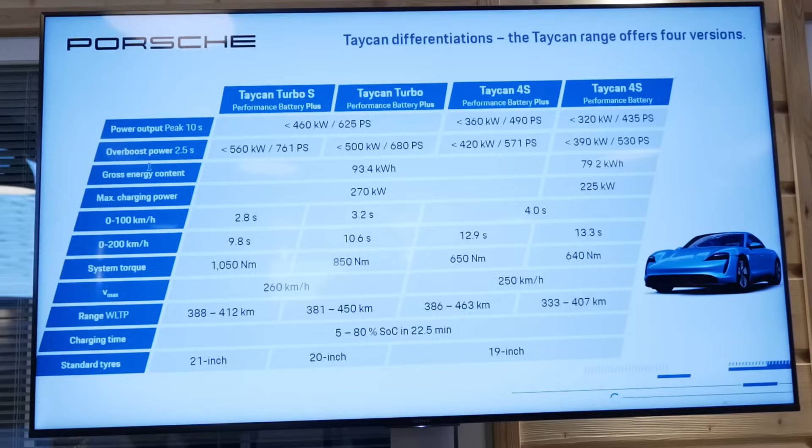All of the vehicles we can see here, all four Taycan derivatives, are four-wheel drive vehicles. They all share, for example, the same two-speed transmission in the back. They share the same dimensions, they share the same trunk space, and try to modularize the powertrain concept.

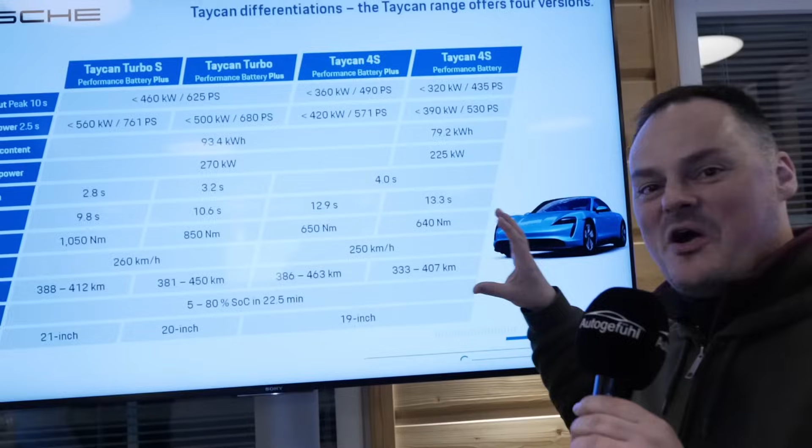Now, obviously, there's a huge amount of technical data for us to wrap our heads around. If I take off my electric car hat and just look at this standardly as a car, we can make some adjustments in terms of how we're looking at the data to make it easy to relate to.

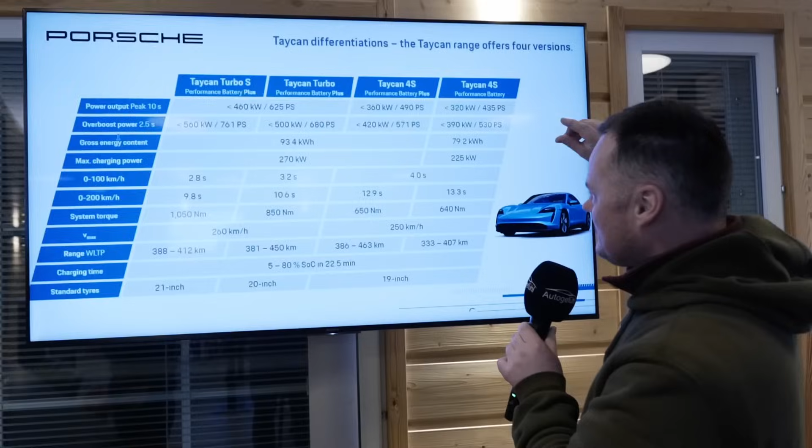So when we're talking about the difference between the 3 different available cars and then the 2 different battery levels, what does that mean in terms of range and in terms of power that is available to us?

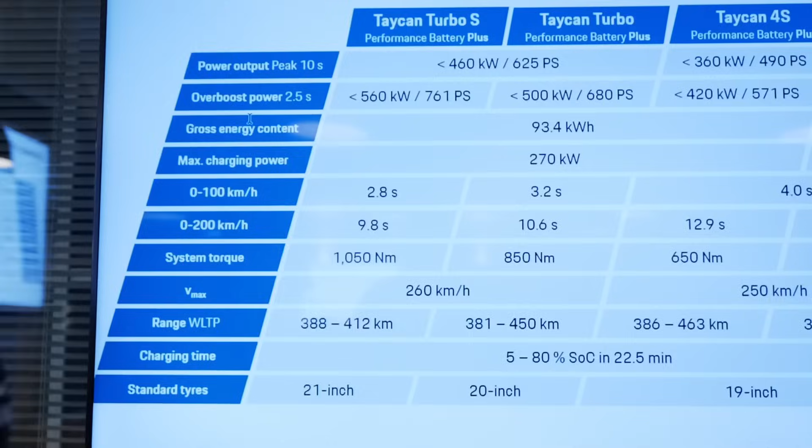Well, I'd actually like to start one step before that. We're positioning the Taycan derivatives via their performance figures. What do I mean by this? If you look at this line, the 0 to 100 figure, they're pretty neatly staggered from 2.8 seconds over 3.2 seconds for the turbo, and now the Taycan 4S with 4.0 seconds.

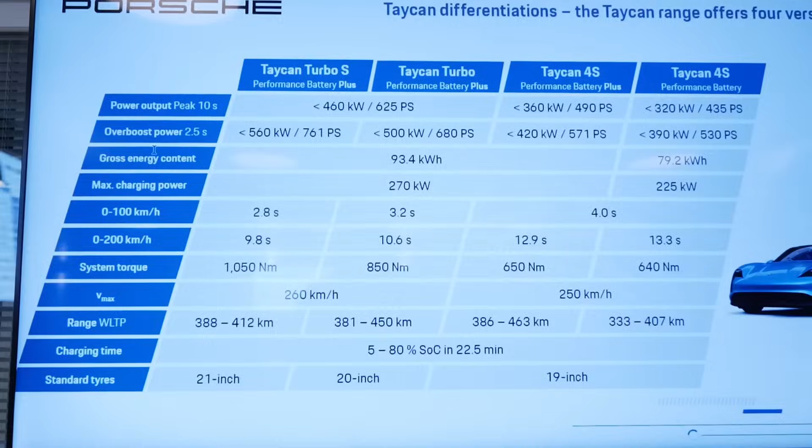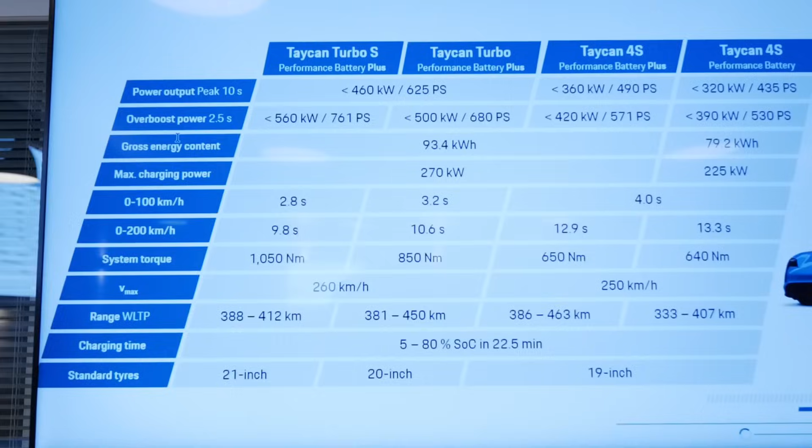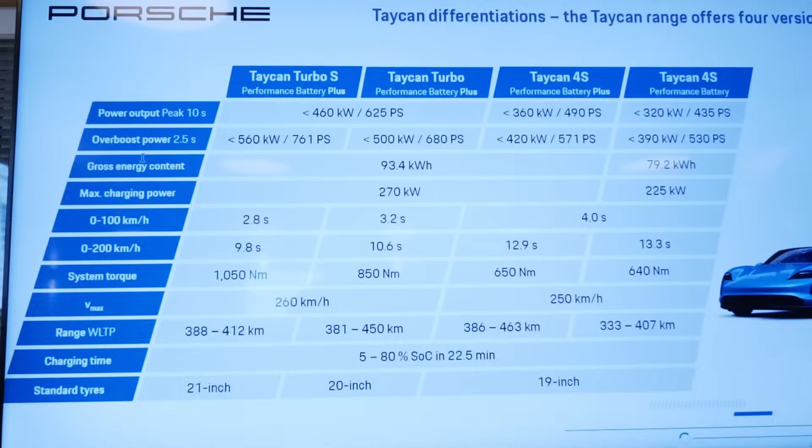What then in turn happens is you need to adjust the power and torque output you need in order to achieve these performance figures. And that's basically what happened. We have incredible overboost power of the Taycan Turbo S, up to 560 kilowatts, then down to 500 kilowatts for the turbo. And now the new 4S has 420 for the bigger battery and 390 kilowatts for the smaller battery.

So this is one of the first things that I'm a little bit challenged by. Here we have a 4-second time for the 4S with the standard and with the performance battery. Now, the performance battery, that's going to weigh more. So how are you keeping exactly the same performance time for that with more weight on board?

Well, that actually was kind of the key challenge, if I can put it this way. As I said, we want to position the cars over the performance figures, the 0 to 100 figures in the market, and that what needs to happen with the roughly 80 kilos less in the smaller battery, we need to reduce the torque level and we need to reduce the power output in order to achieve the 4 seconds.

Basically, both derivatives are, as I said, 4-wheel drive. Nevertheless, they are differentiated roughly by 40 kilowatts in the performance output.

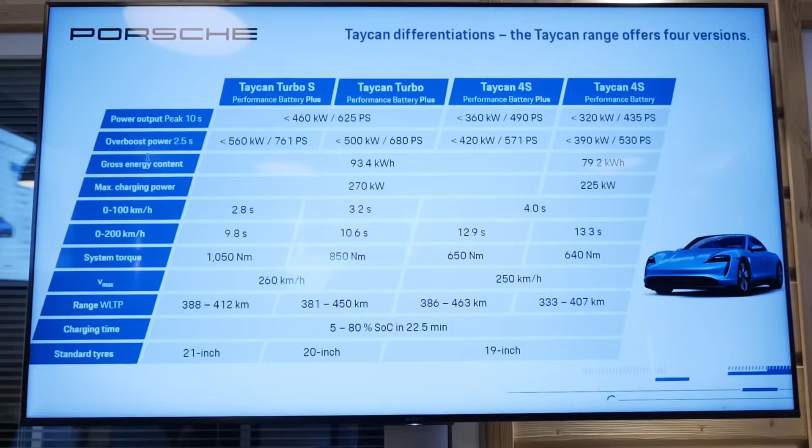So between the Taycan and the Panamera, say, do you have any idea from lighter to heavier what the difference is in weight? Well, yeah, we do have 2,295 kilos, and down on the right side, the range is 2,140 kilos. So there again, that helps us to have a pretty good understanding of what the difference is in terms of, really, I guess, my expression would be technical achievement, because if you consider how the car handles versus how you expect the car to handle with that kind of weight on board, it really is significant.

Now, if by the wizardry of technology we could ask for the next slide, look at this. Autogefühl magic, I say that, but actually it's the guys from Porsche really helping us out. So look at that. Now, I'm going to be completely honest here, this comes to the next thing that I'm not entirely clear on.

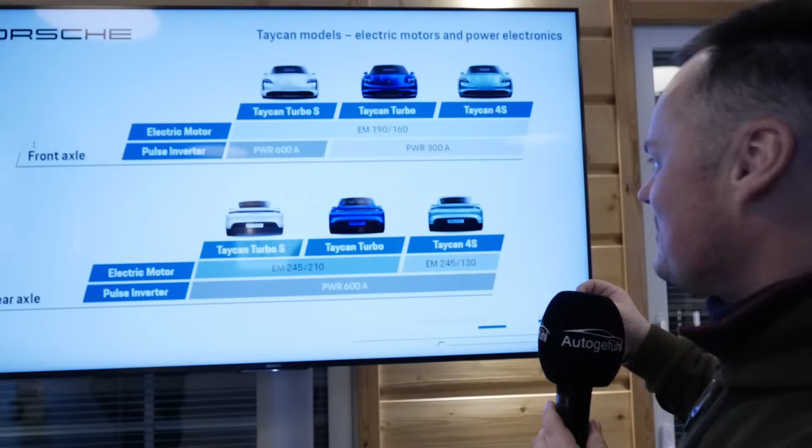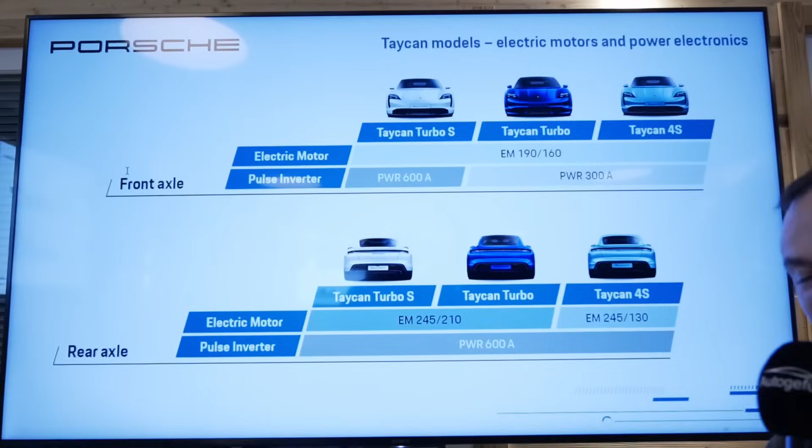This is a really important feature. This is clearly how the car is being powered. Electric motor in the front, electric motor in the back, but they are not standard throughout the whole lineup. There are differences. Fortunately, Bernd is going to be very helpful in explaining to us exactly what those differences are. Well, at least I'm going to try, I think.

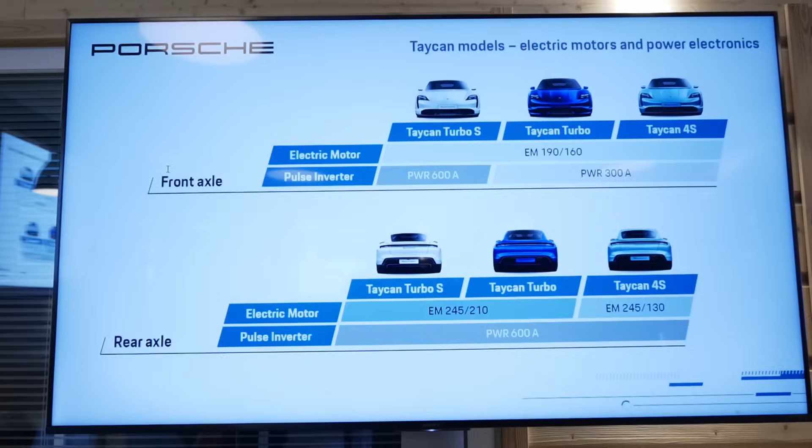Let's start at the front axle. Basically, what we did, we tried to take a modular approach, so we tried to minimize complexity in the car, and that also holds true for the electric motors and power inverters. So what happens on the front axle is all 3 cars share the same electric motor. The numbers stand for diameter, so it's a 190 millimeter diameter of the electric motor, and the length is 160 millimeters. What then happens, we differentiate the cars in terms of their pulse inverters, the power electronics.

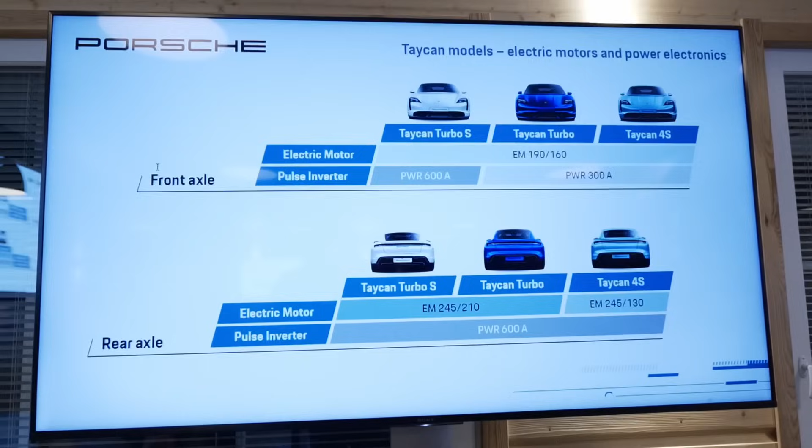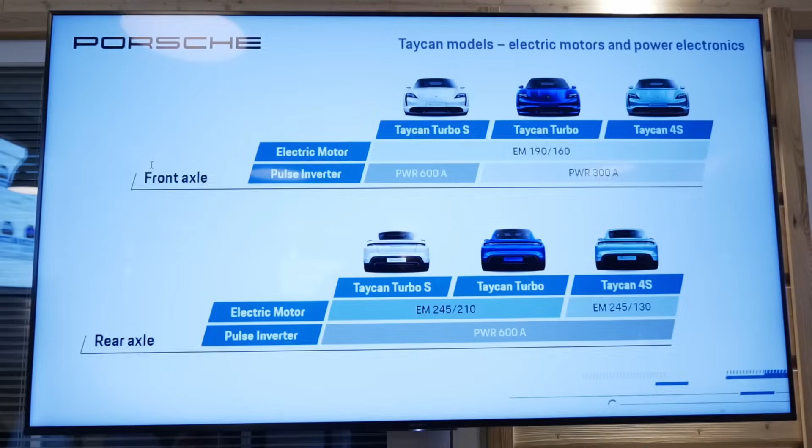Turbo S has the 600 amp power inverter, which basically PWR stands for Pulswechselrichter. This is a very complicated German word. It's basically the same you can see on the rear axle. Taycan Turbo and Taycan 4S share the same power electronics, which is basically half of that what Turbo S has, and is at 300 amps.

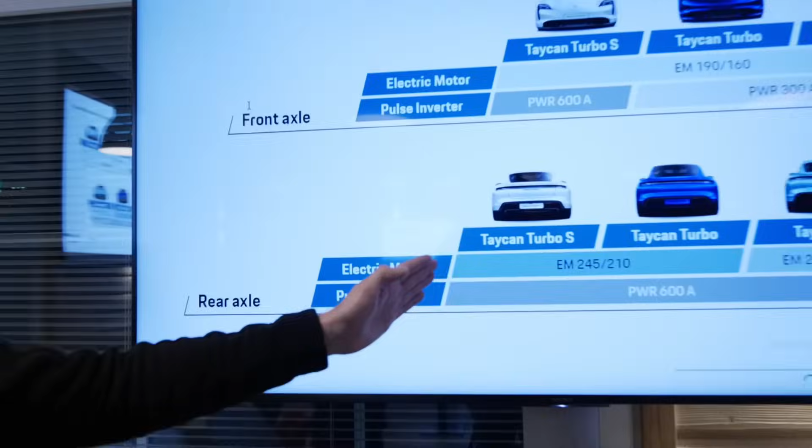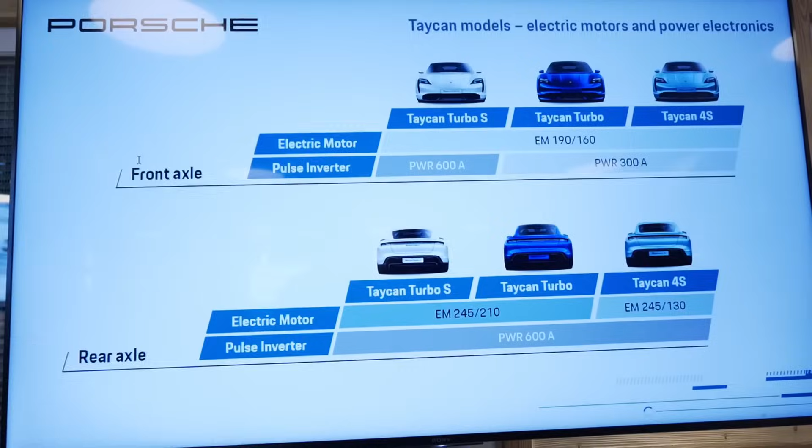If you now look at the rear axle, Taycan Turbo and Taycan Turbo S share the same electric machine. As you can see, the electric machine itself is bigger, not only diameter-wise, but also length-wise, compared to the one on the front axle. And what we then did is we simply shortened this electric motor in the 4S.

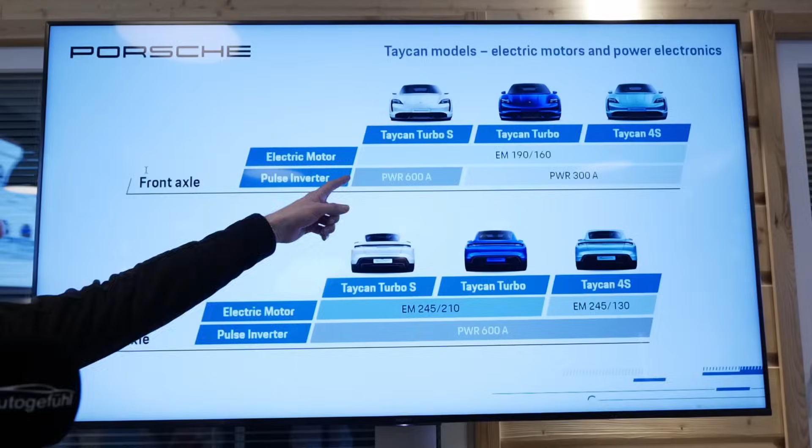Again, taking the modular approach, keeping complexity as low as possible, they're even sitting in the same housing. If you go to Zuffenhausen, to the production facility, even our engineers can't tell the difference just by looking at the rear axle module, because both electric machines sit in the same housing. All three or four derivatives share the same power electronics, which is the same on the front axle for the Taycan Turbo S, and all of them have this power electronics on the rear axle. One thing not on the slide: all cars have the same 2-speed transmission on the rear axle, and the same non-clutch single-speed transmission on the front axle.

Thank you. I think, being as straightforward as I know how to be, it took us a long time to learn the language of internal combustion engines. It's going to take a little bit of time for us to learn the technologies here, not least because they're still being developed even while we're talking about them. But hopefully this has given you a little bit of insight as to what's happening beneath that hood and in that car. This should all become more and more familiar as we get used to the technology. But you know what, it's all a lot of technical numbers. Really, when it comes down to it, if you want to understand it, you just have to give it a drive.

As the sun sets really rather rapidly here in Finland, it's time for us to reflect on what we think of the Taycan 4S. Well, I have to tell you, I'm starting to feel a bit like I'm becoming an advert for Porsche. So before you guys all get mad and write in the comments, let me explain. I've spent a very long time waiting for this car, and it absolutely blew me away when I tested the Turbo S in Luxembourg. So when Porsche said I had the chance to come and test the 4S here in Finland, I had mixed feelings. I really liked that car so very much, and I have to be honest, I just didn't know how much was going to be capable of being delivered in this cheaper package. How much cheaper? Well, if you want to go Turbo S, that's around 185,000 euro. You want to go standard Turbo, it's around about 155, and if you want to go for this, the 4S, you're looking at around about 105,000 euro. So that isn't nothing, but when you stack it up against the competition, it's really very reasonably priced.